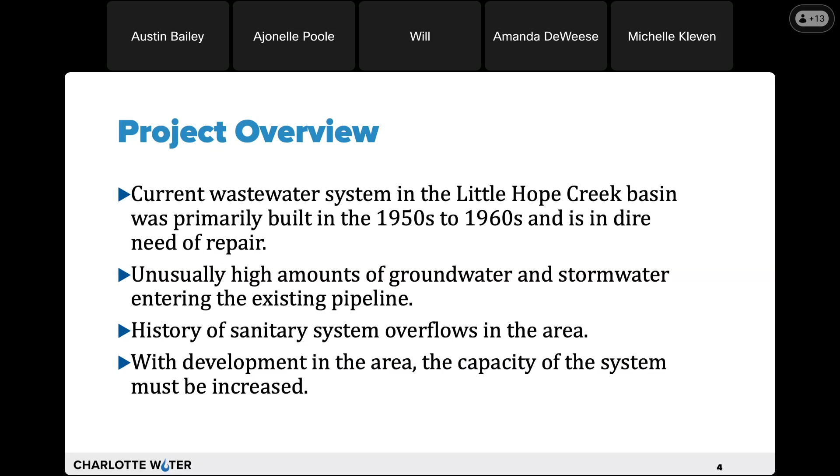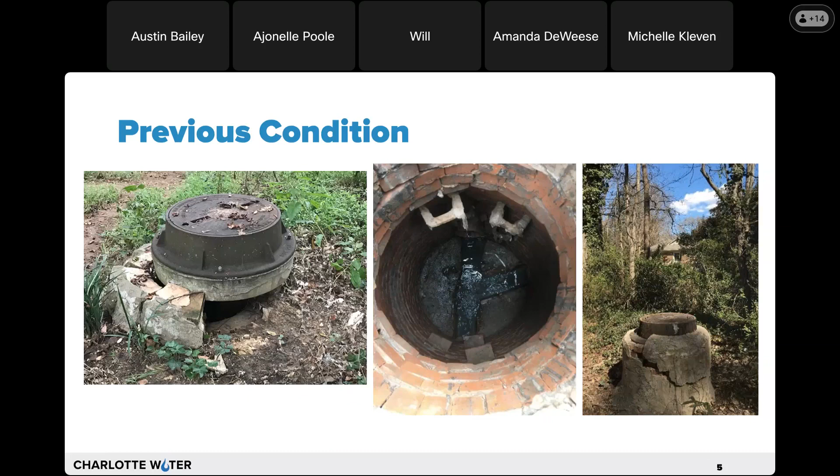Next slide. These are some pictures of other parts of this project. It's a 3-phase project, so phases 1 and 2 are complete. These are some examples of manholes that have been replaced. You can see water will flow into the manhole on the left there, cracks in the manhole on the right, and the one in the middle, you can see some of these manholes were built brick by brick back in the 50s and 60s when the sewer was originally created. That's antiquated technology, we do not build manholes brick by brick anymore. They come cast concrete now, much better for longevity and keeping sewer in the sewer where it's supposed to be. So we're going to be replacing all these manholes that are still brick and still out in the system. Next slide.

Project goals are basically just solving the problems we've listed already. Taking an old system that's undersized and gets used too much, upsizing it and making it new so it will last a lot longer. Keep dirty water inside of our sewer pipes where they can go down to the treatment plant and we can clean that water, keep the sewer in the sewer, essentially. This is going to benefit Little Hope Creek, and it will benefit the surrounding areas as well.

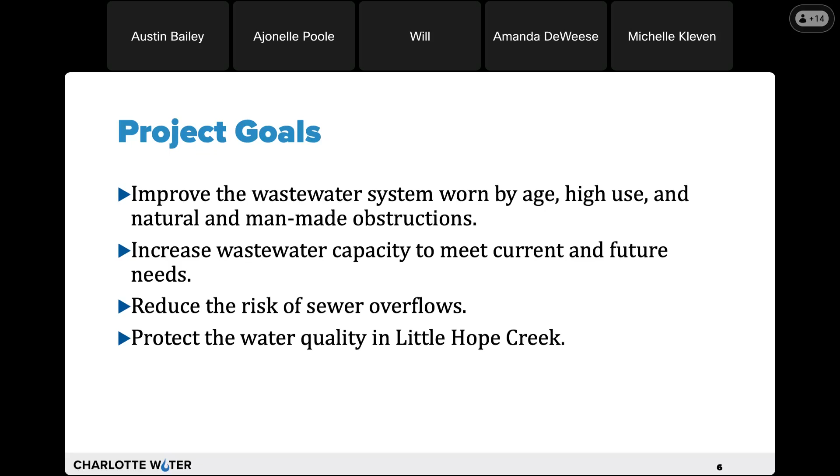Here's a good map showing the Little Hope Creek sewer basin. If you were to turn this map a little bit, assuming South Boulevard ran north-south and Park Road ran north-south, essentially this is everything between Park and South Boulevard. So east of South Boulevard, west of Park Road, and north of Tyvola.

All the wastewater in this area flows downhill to the treatment plant right there at the corner of Park Road and Tyvola. This basin is kind of nice - we actually have a good amount of topography, so we're able to just have gravity have that water flow downhill without having to do any pumping whatsoever. So literally all the water leaves y'all's houses, and it just flows downhill until it gets to Park and Tyvola at our treatment plant, where we make it clean again.

Phase 1 and 2 are the light gray and dark gray - those are completed. We are now in the phase 3 section, and phase 3 has 3 subsections, so you see 3A, 3B, and 3C. The phase and subphase we're really talking about tonight is what's in red there - that's sort of the first half of 3A.

It's from the existing new sewer over on Mockingbird, I believe, and it goes up to Woodlawn, and then we are going to go ahead and do a tunnel bore under Woodlawn as well, and then this subphase continues just on the other side of Woodlawn.

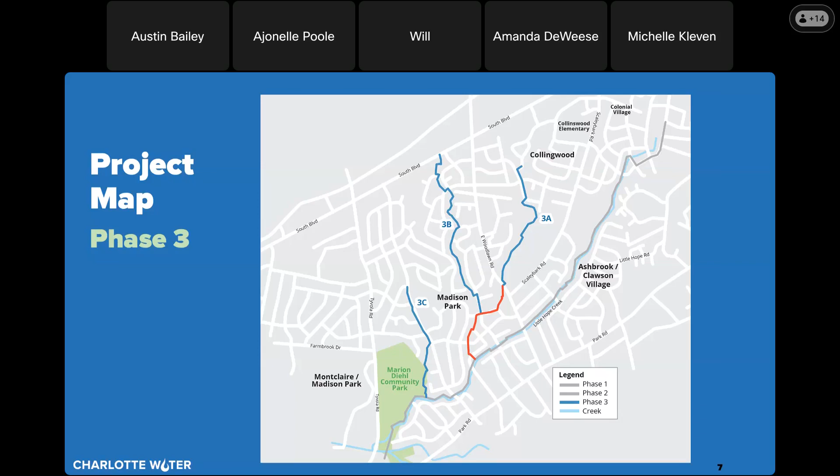Overall, the project started back in 2021.

17,000 feet of pipe have been installed to date. And again, a lot of that pipe was 8-inch, 24-inch, and very, very old. We're going to upsize it to 12-inch and or up to 36-inch.

This is a nice picture - that beautiful sort of green-blue color pipe is C900 PVC. That's what we're putting in the ground.

As I just mentioned, we're in the third phase of the 3 phases. This is what it will look like typically in our easement. You can see the black silt fence - it keeps back silt on the left side there. And then you can also see a temporary fence on the right side there. You can see they're working in and around some power poles and some other infrastructure.

Essentially, the way it works is they dig enough to put a single section of pipe in. They put the section of pipe in, connect it to the previously installed pipe, and then they backfill and move those 2 excavators down one section and install that pipe one piece at a time.

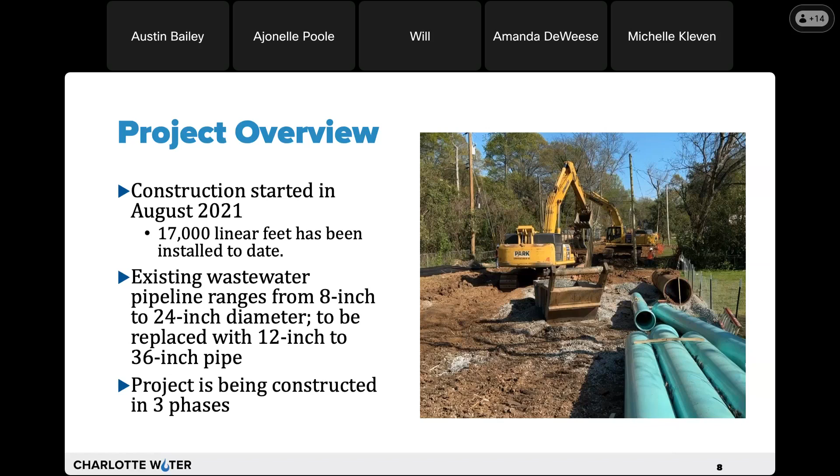So again, I mentioned that this sort of reddish area is the part that we're talking about tonight. In terms of that section, we've done all of our land surveying, and we've done some underground utility marking.

We've done flow metering, and some of you may have seen recently we did some geotechnical down there at Marion Diehl on a different section, but we've already done it on this section as well to see where the rock is. We've done some video inspection of the old pipe.

There's basically been a lot of groundwork laid to ensure that we have good justification for doing the project. We did a lot of assessment on the other line, did a lot of monitoring, figured out how much water we need to have once we're done with the project, and finalized the design for this project as well to get ready to actually do the construction.

And then, of course, the last piece is once we know where the line is, we go out to all y'all homeowners and try to get easements, and that way we have a place where we can put that pipe on the ground.

Easement acquisition, we're really close to being done with that. I think there's a handful of people left that we're still in negotiation with and talking to, but for the most part, that's really close to being done. We're hoping to wrap up by the end of the year with easement acquisition.

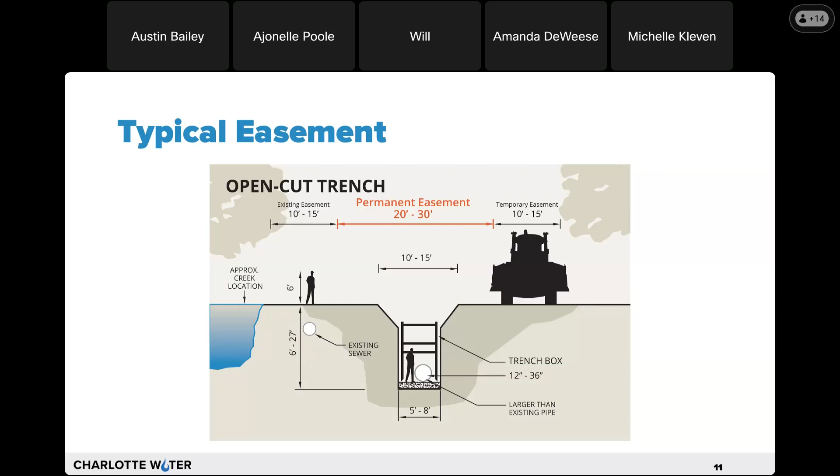Next, I think we're going to have Austin talk a little bit about construction and about what y'all might see.

Good afternoon everyone, my name is Austin Bailey. I will be the project manager for Park Construction on this project. We're going to be starting our construction timeline in early November. You'll be seeing surveyors coming out and marking what is called the LOD, or limits of disturbance. They'll be flagging that, and then following that operation, you'll be seeing clearing activities begin with tree removal and things like that.

There are a handful of construction activities that will go on with this. Of course, the clearing will start. This will also include equipment deliveries coming in, getting those excavators Will talked about earlier. You'll see equipment getting mobbed or mobilized into the easements off of trucks. You'll see connex boxes, supplies, our actual pipes and manholes coming to the job site as we need the material. You'll see erosion control, safety areas established with orange safety fence and temporary fence measures. Some traffic control measures may be implemented during some of the project, depending on where we are. Those will be well delineated for everyone to know.

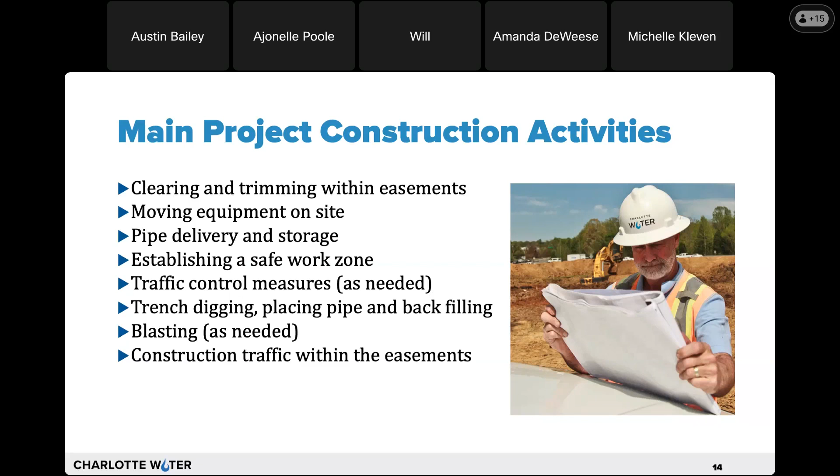Clearing activities: like I've talked about earlier, surveyors will come through and you'll see flags hung on the tree line. These delineate the boundaries of our clearing operations, with markers and ribbons. They'll come through to remove trees, bushes, shrubs, anything within the LOD. This could include fencing, sheds, or any item in that easement area, so the pipeline construction can happen quickly and efficiently.

Will, want to get your input here on the blasting. I think Will is having connection issues, I'm looking to see if he was able to call in. Not a problem, keep going, thank you.

Just a quick synopsis here. What is blasting? Everybody tends to think of the movies, but it's definitely not the case. These are small, controlled shots used to remove underground rock, broken up so we can excavate and install the pipeline. During this process, we maintain seismograph monitors in the blasting area. These monitor ground vibrations to make sure we stay within the prescribed limits allowed by industry standards.

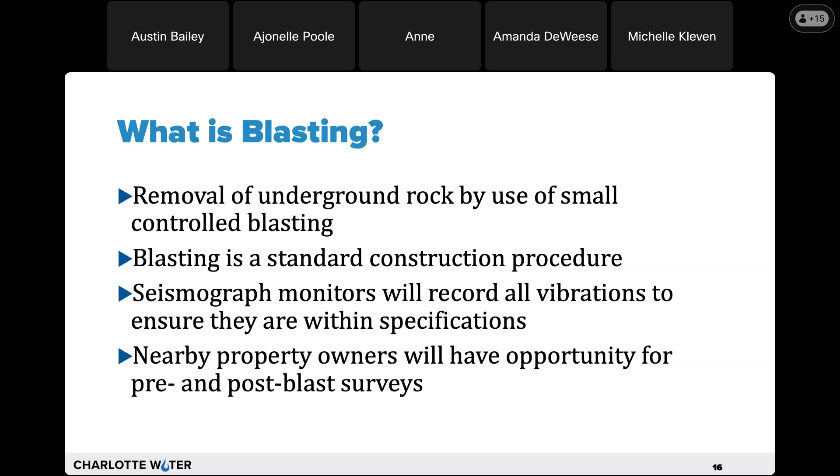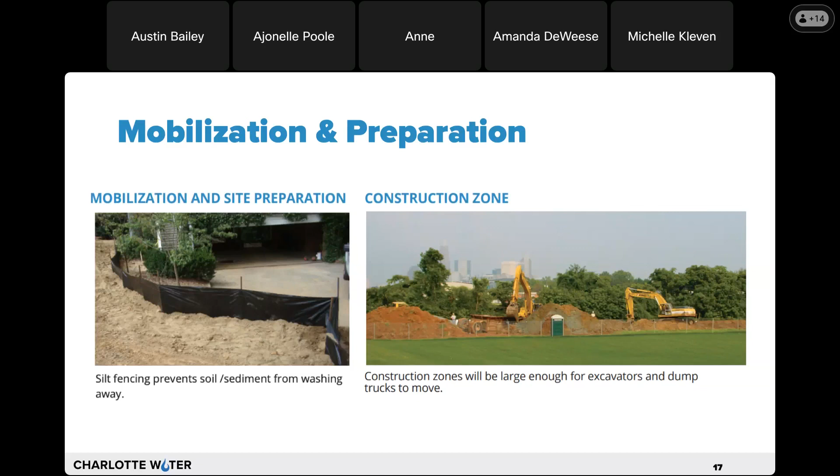Manholes vary in size. What you see at the top, just a ring and cover, may get very big underground. In this case we're doing a range of sizes, starting with some 24-inch, so they won't be too big. You'll see precast concrete structures, box-looking pieces and round-looking pieces made of concrete, that will be above ground right before they go into install. Those are our manholes that we'll put together kind of like Legos on site, and we'll be burying those along with the pipeline.

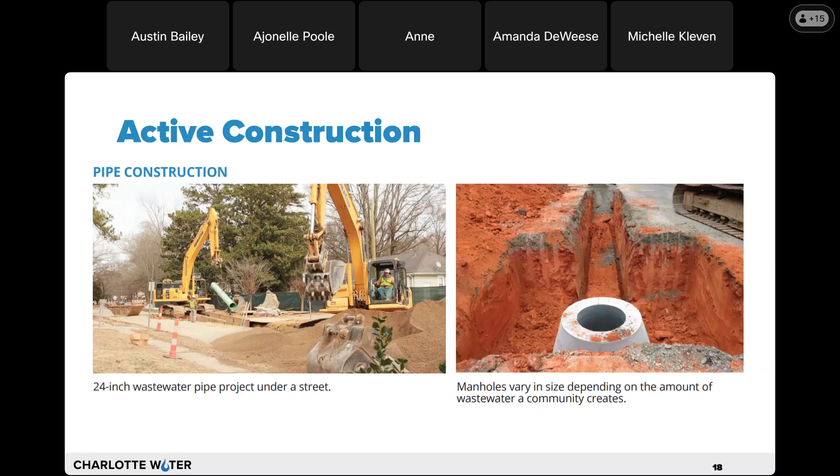And then finally, construction and restoration. Once the pipeline system comes through and the construction team gets that installed, we'll follow up with a restoration phase. That crew will come through and seed and straw to get the easements back to their pre-existing conditions before we were there. Our best goal is to get a good stand of stabilization and get out of that easement like we left it, all cleaned back up.

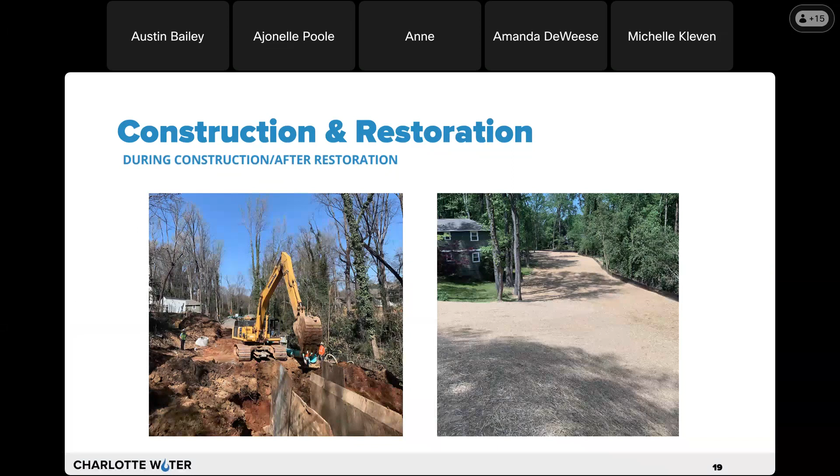At the end of that, you may see some silt fence remaining for a time, and that's just until we can get a good stand of grass on the easement so we can pull that silt fence out. All right, next slide, and I'll turn that back over to Ajonelle for closing this out.

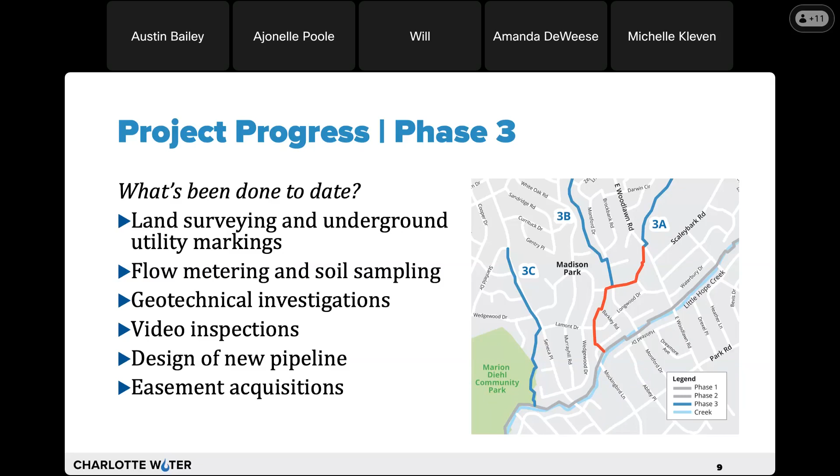And I'm pretty sure he'll be able to look more into those questions. Yeah, and I do live in Sedgefield as well, so I'm pretty close to y'all. I'm also available to come over and meet you, and we can go out back and point to the creek, point to the old sewer, and point to where the new sewer will go.

That's helpful. All right, Carl, would you mind hopping in if you have anything you want to add right here, please?

Sure, Ajonelle. Good evening, folks. I'm Carl Wilson, Chief Engineer of Charlotte Water for the Operations and Capital Group. I've met some of you all in a prior meeting, but I do want to address one question up here that asks about replanting trees.

Just to give you all a heads up, that's something we're in the early stages of. I am in the early stages of speaking with our city arborist about it. As a matter of fact, we exchanged voicemails this week to try to catch up about any type of mitigations or additional tree planting for when we remove these trees, or clear easements, such as what we're about to do. So I don't have the specifics, but I wanted to let you know that we understand. Charlotte is a green city, and we try to protect the environment as well as we can, and sometimes that conflicts with providing service. But I wanted to let you know that we did get that question, and we are working on an answer for it.